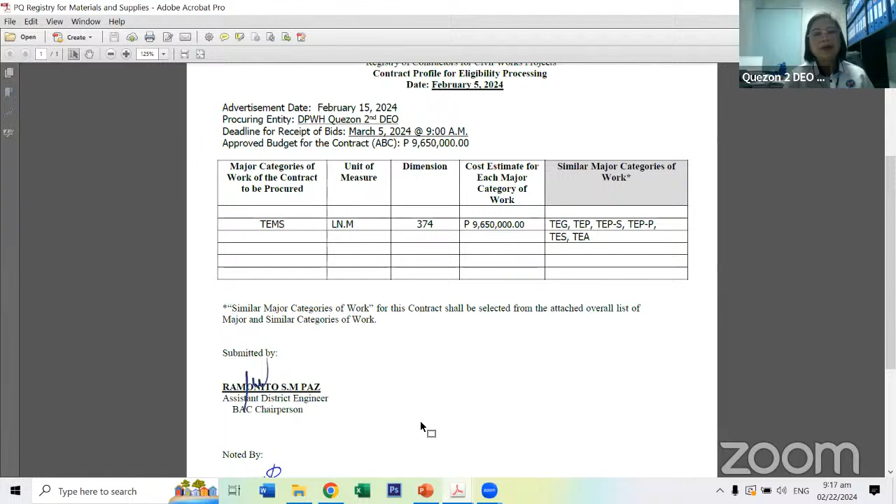Contract profile is TEMS 374 linear meter. May similar category support na TEG, TEP, TEP-S or 5 or S, TEP-S and TEP-P, TES and TEA. So makikita ito po yung mga categories, similar categories.

Approved budget for the contract, 7,425,000 pesos. Source of fund, GAA 2024. Contractor size range, small B with license category C and D. Cost of bidding documents is 10,000 pesos.

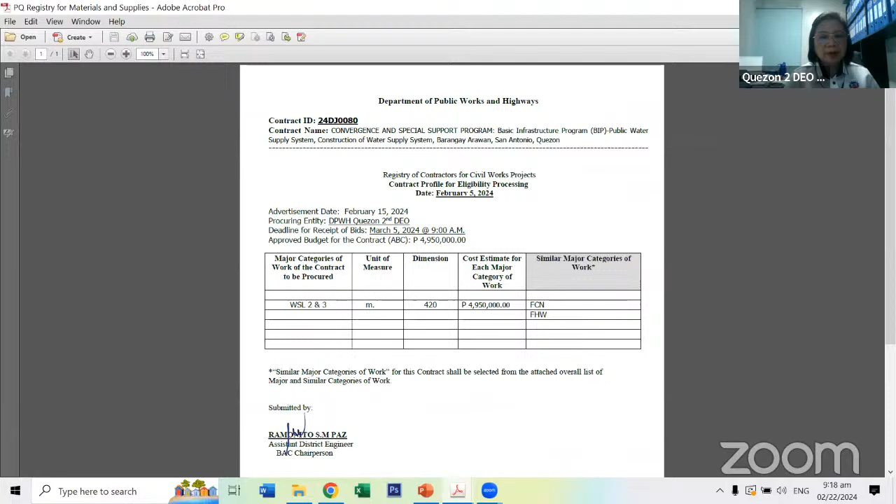Contract profile. Ang major category support po is BICWOPLS for one-story building. Next po.

Number 4. 24DJ0080, Convergence Special Support Program, Basic Infrastructure Program or BIP, Public Water Supply System, Construction of Water Supply System, Barangay Arawan, San Antonio, Quezon. Scope of work is construction of 420 linear meter water supply system.

Approved budget for the contract, 4,950,000 pesos. Source of fund, GAA 2024. Contract duration is 120 calendar days. Contractor size range, small B with license category C and D. Cost of bidding documents is 5,000 pesos. Ito po yung contract profile, eligibility profile, WSL 2 and 3, ang major categories of work.

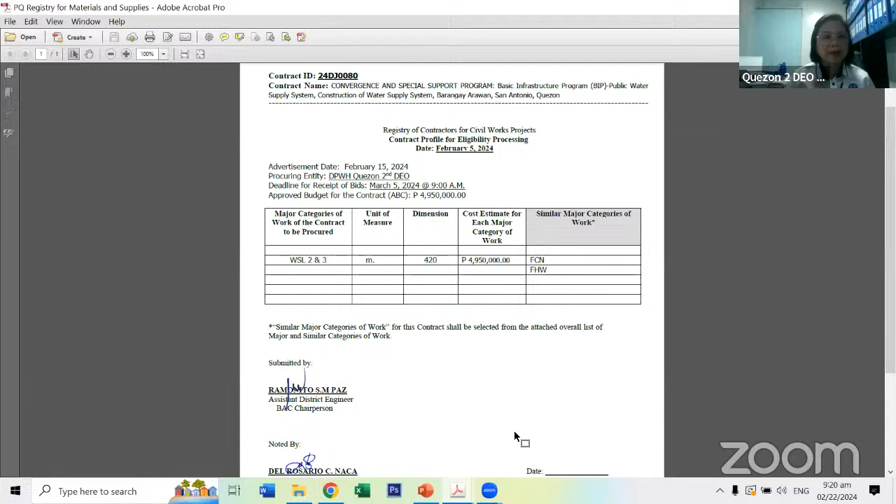Okay, next is number 5, 24DJ0081, Convergence Special Support Program, Basic Infrastructure Program or BIP, Public Water Supply System, Construction of Water Supply System, Barangay Bignay 1, Sariaya, Quezon.

Scope of work, construction of 540 linear meter water supply system. Approved budget for the contract is 4,950,000. Source fund, GAA 2024. Contract duration is 120 calendar days. Contractor size range, small B with license category C and D. Cost of bidding documents is 5,000 pesos.

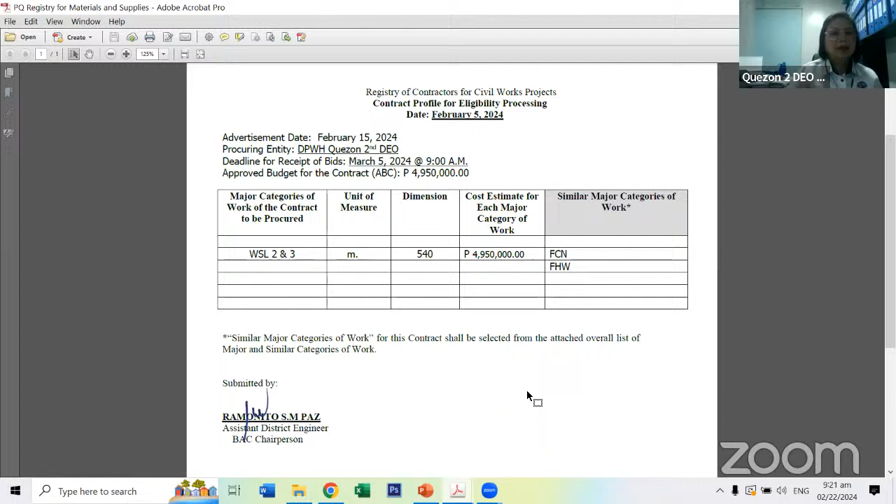Contract profile is major category support, WSL 2 and 3. Next po.

Approved budget for the contract, 2,475,000. Source of fund GAA 2024 and contract duration 105 calendar days. Contractor sizing small B with license category C and D. Cost of bidding documents 5,000 pesos.

Contract profile eligibility, BICWOPS for one-story building. So next po is yung presentation ng program, scope of work, and plans. Thank you.

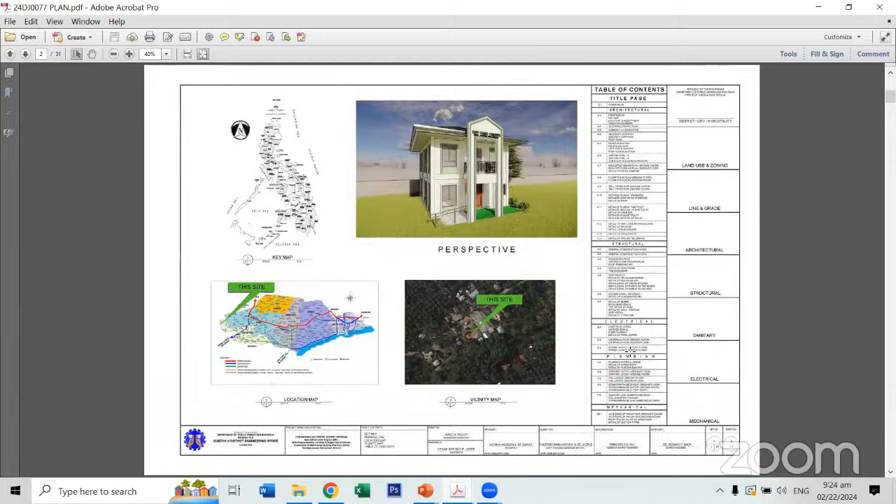Plans of the proposed project. This is the title page. This page shows the perspective, the location map, the vicinity map, and also the table of contents.

This shows the site development plan, the project. This shows the summary of quantities. This page shows the ground floor plan, the second floor plan, and the roof plan of the project.

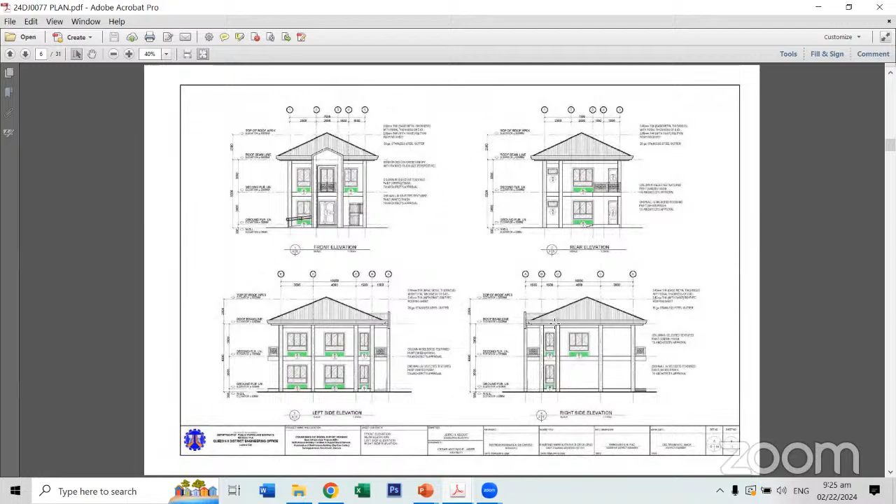This page shows the front, rear, left side, and right side elevation. This plan shows the schedule of doors and windows.

This page shows the reflected ceiling plan and the detail of metal furring. This page shows the floor finish plan. This page shows the wall finish plan for ground floor and second floor.

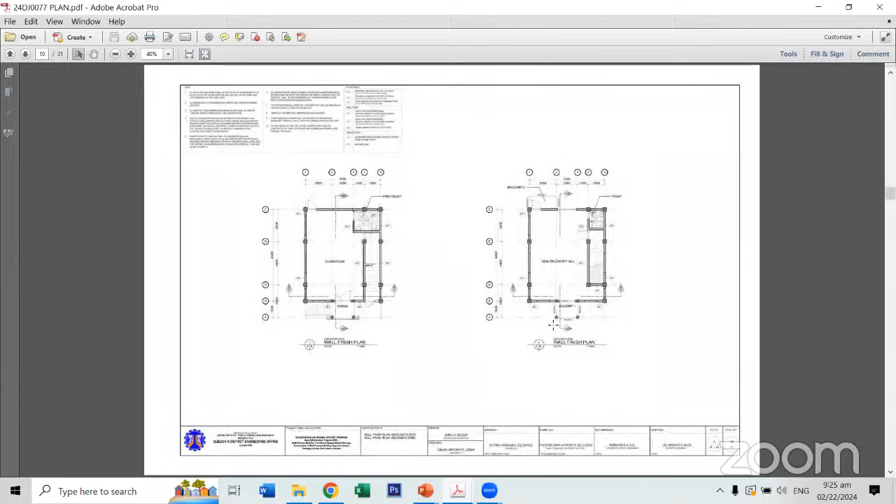This page shows the details of section of staircase, the details of ramps, details of plan of staircase. This shows the detailed plan of the toilet, detailed section of the PWD toilet, details of grab bar, and detailed section of toilet.

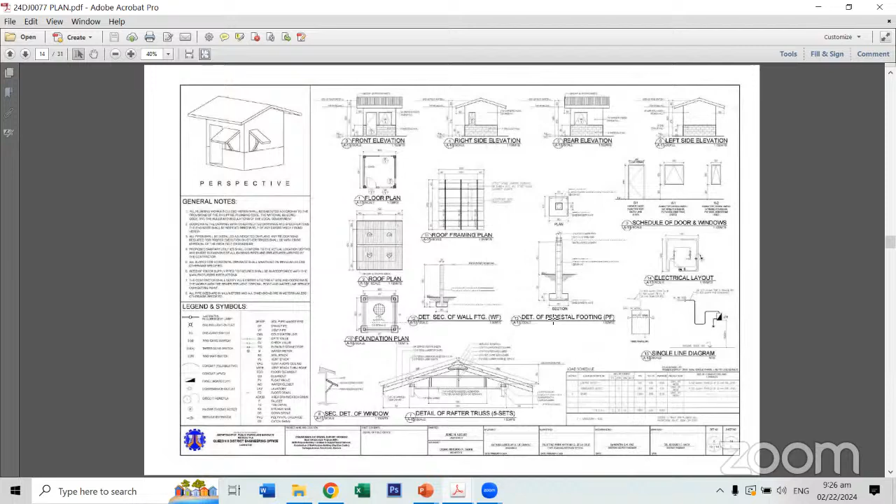This shows the DPWH standard field office. This shows the DPWH standard project billboard. These are the general construction notes.

This page shows the foundation plan, the second floor framing plan, and the roof framing plan. This shows the truss diagram and the details of main trusses.

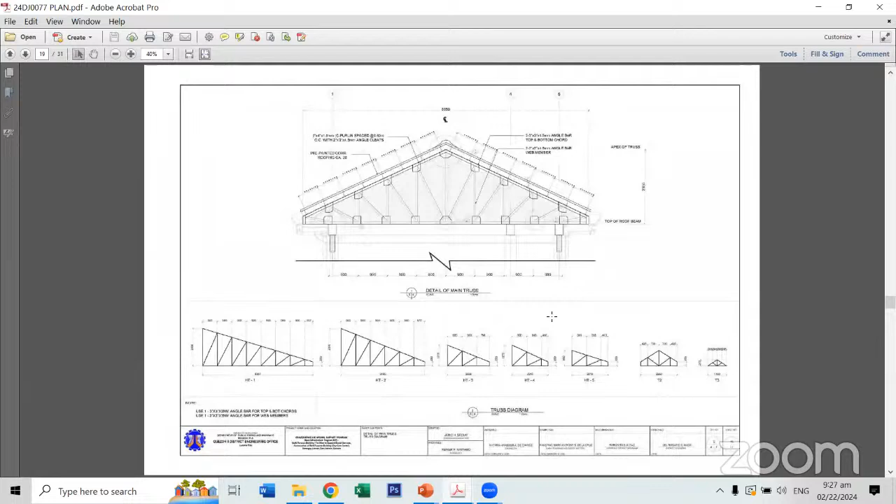This shows the details of purlin splice, the details of truss anchorage, details of connection of purlin to top chord, details of connection of purlin to sag rod, details of connection of cross bracing, and other details.

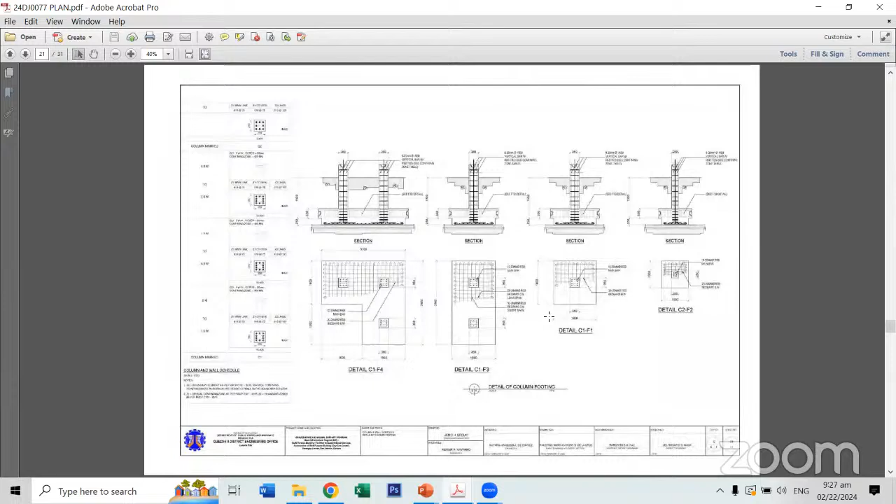This shows the details of the column footing. This shows the details of the staircase and the spot details, also the detail of wall footing, and the details of beams.

This shows the details of the panel board, the riser diagram, and the electrical notes. Also the load schedule of the electric. This shows the lighting layout for the first and second floor.

This shows the power layout for the ground floor and the second floor.

This page shows the detail of floor clean out and the detail of catch basin. Also the plumbing notes.

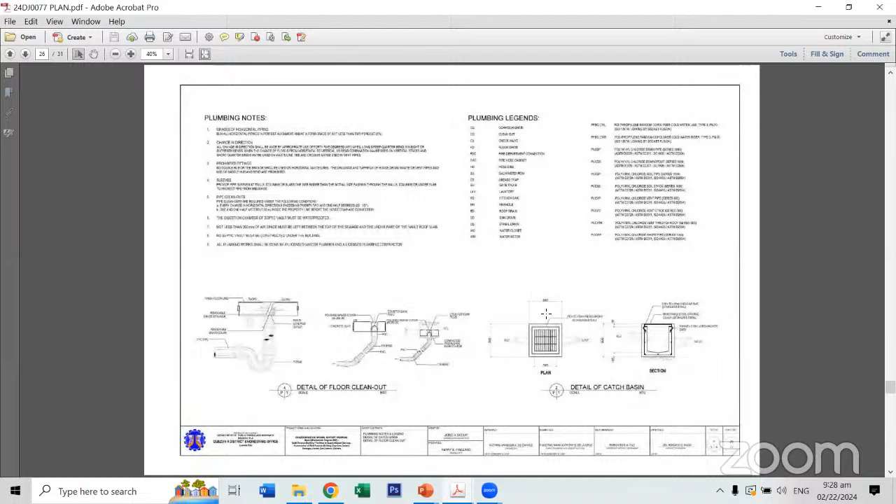This shows the sanitary layout for the ground floor and the second floor.

This shows the cold water line layout for the first and second floor.

The storm drainage layout for the first floor, second floor, and the roof. Next page, please.

This shows the sanitary line isometric diagram and for the storm drainage, and the isometric diagram for the sanitary line and the CWL.

This shows the AC and exhaust fan layout for the first and second floor. Also the mounting detail for the air conditioning condenser and the detail of suction piping.

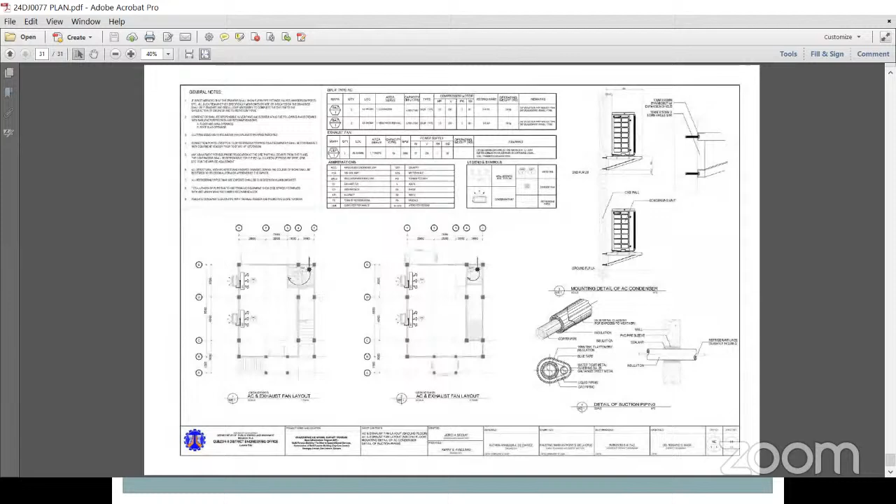Plans of the scopes of works. For the scopes of works, Part A, facilities for the engineer: construction of field office for the engineer, provision of furnitures, fixtures, equipment, and appliances for the field office for the engineer, and provision of progress photographs.

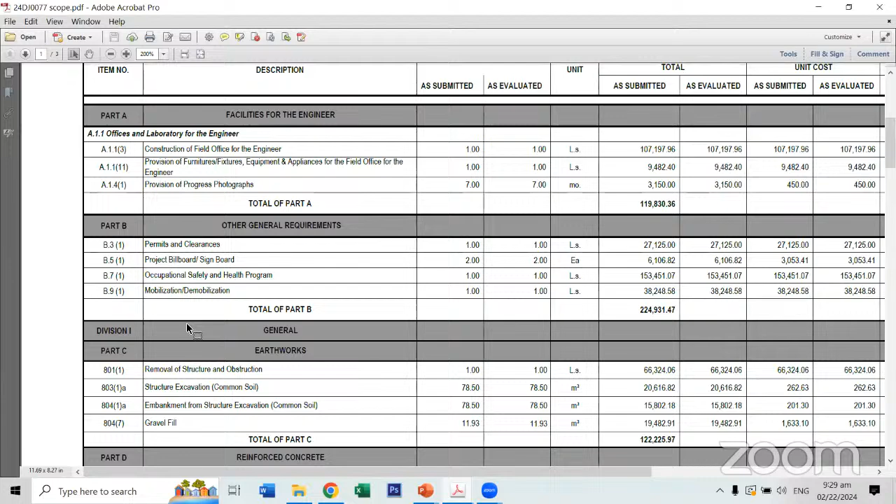For Part B, other general requirements: permits and clearances, project billboard, signboard, occupational safety and health program, and mobilization, demobilization. Under Division 1, General, Part C, Earthworks: removal of structure and obstruction, structure excavation for common soil, embankment from structure excavation, common soil, and gravel fill.

Under Part D, reinforced concrete: structural concrete 4,000 PSI Class A at 28 days, structural concrete 3,000 PSI Class A at 28 days, reinforcing steel grade 40 deformed and reinforcing steel grade 60 deformed, and also formworks and false works.

Under Division 2, Buildings, Part E, Finishing and Other Civil Works: soil poisoning, CHB non-load bearing including reinforcing steel 100 millimeter, CHB non-load bearing including reinforcing steel 150 millimeter, carpentry and joinery works, doors for wood panel.

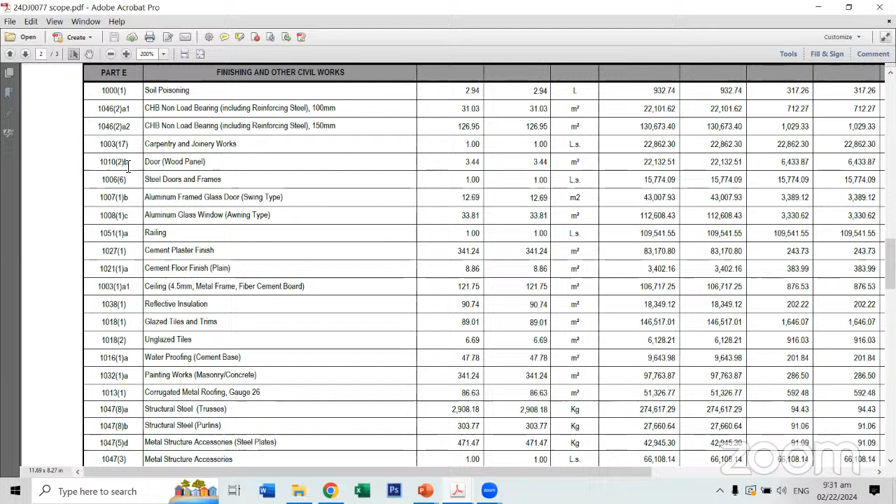Steel doors and frames, aluminum framed glass doors swing type, aluminum glass window awning type, railing, cement plaster finish, cement floor finish plain, ceilings 4.5 millimeter metal frame, fiber cement board, reflective insulation, glazed tiles and trims, unglazed tiles, waterproofing for cement base.

Painting works for masonry and concrete, corrugated metal roofing gauge 26, structural steel trusses, structural steel purlins, metal structure accessories, steel plates, metal structure accessories, bolts and rods, fabricated metal roofing accessory, flashing gauge 26.

We also have fabricated metal roofing accessory gauge 24 for gutters, sewer line works, cold water line works, storm drainage and downspout, plumbing fixtures, and catch basin.

For Part F electrical: conduit boxes and fittings, conduit works and conduit roughing-ins, wires and wiring devices, panel board with main and branch breaker, lighting fixtures and lamps. For Part G mechanical: air conditioning package split type.

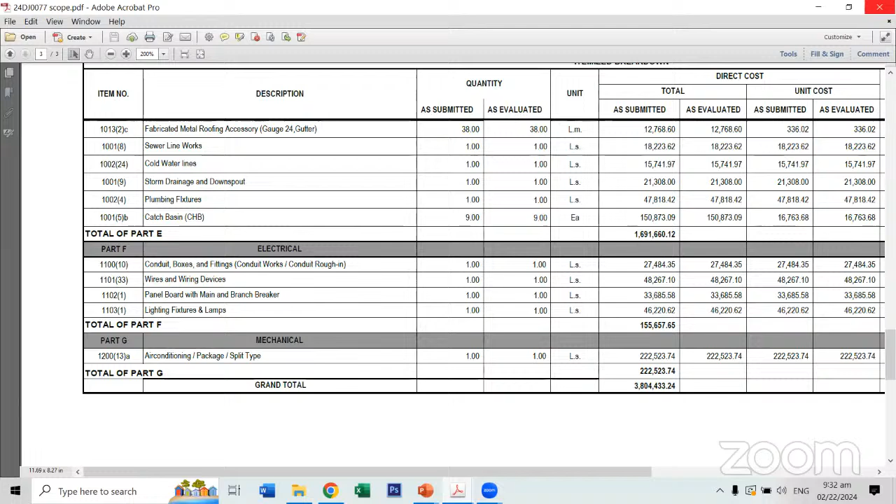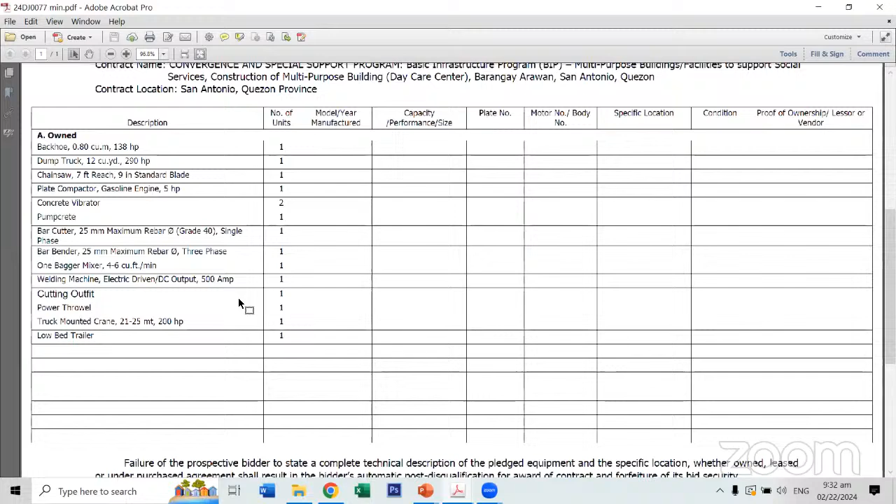Minimum equipment requirements: one backhoe 0.80 cubic meter 138 horsepower, one dump truck 12 cubic yards 290 horsepower, one chainsaw 7 feet reach 9 inches standard blade, one plate compactor gasoline engine 5 horsepower, two concrete vibrator, one pumpcrete, one bar cutter 25 millimeter maximum rebar.

Single phase, one bar bender 25 millimeter maximum rebar three phase, one bagger mixer 4 to 6 cubic feet, one welding machine electrical driven DC output 500 amperes, one cutting outfit, one power trowel, one truck mounted crane 21 to 25 metric tons 200 horsepower, and one low bed trailer.

For manpower requirements, we need one project manager, one project engineer, one accredited materials engineer, one construction foreman, one first aider, and one safety officer.

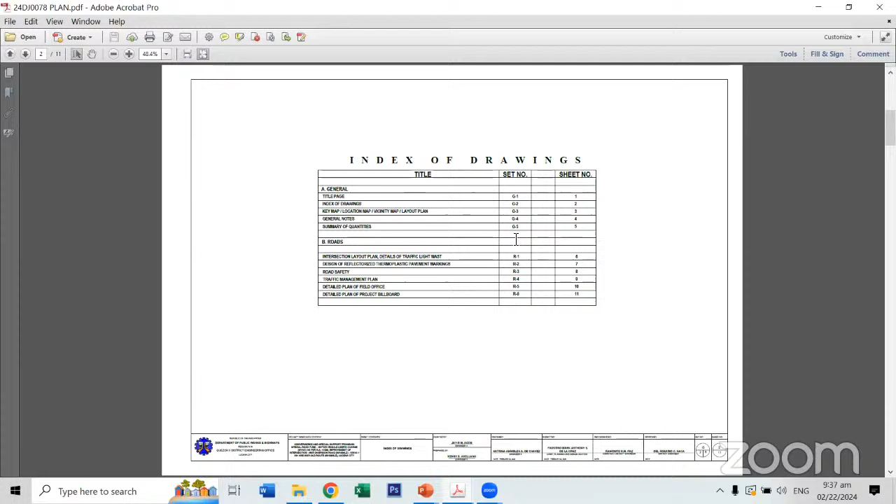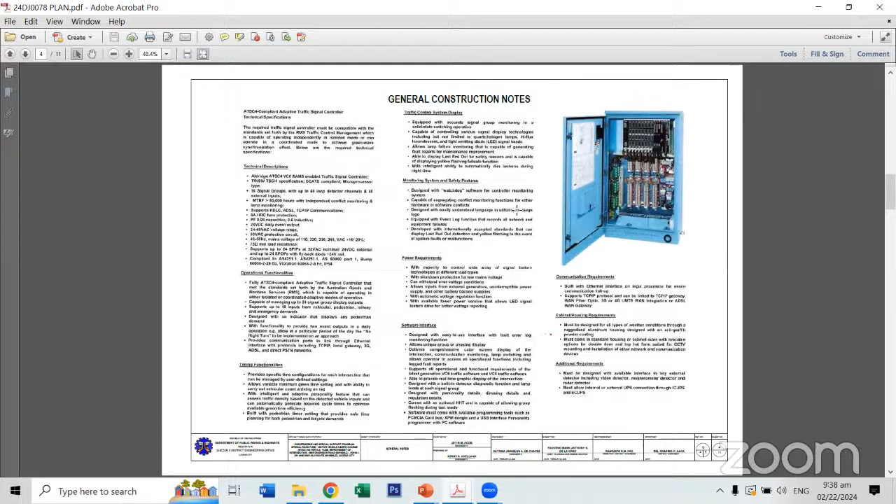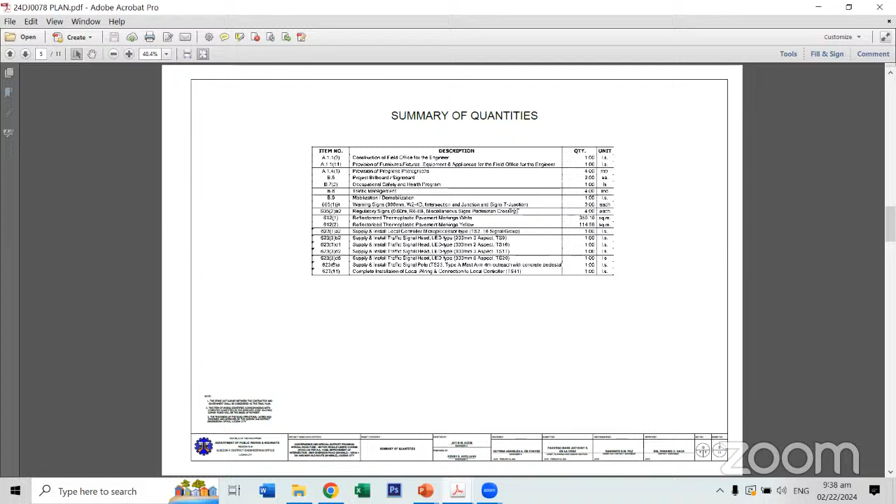Plans of the proposed project. Title page po natin. Index of drawings. Layout plan, location map, key map, vicinity map. General construction notes. Summary of quantities.

Intersection layout plan. Details of traffic light mast. Details of reflectorized thermoplastic pavement markings. Road safety details.

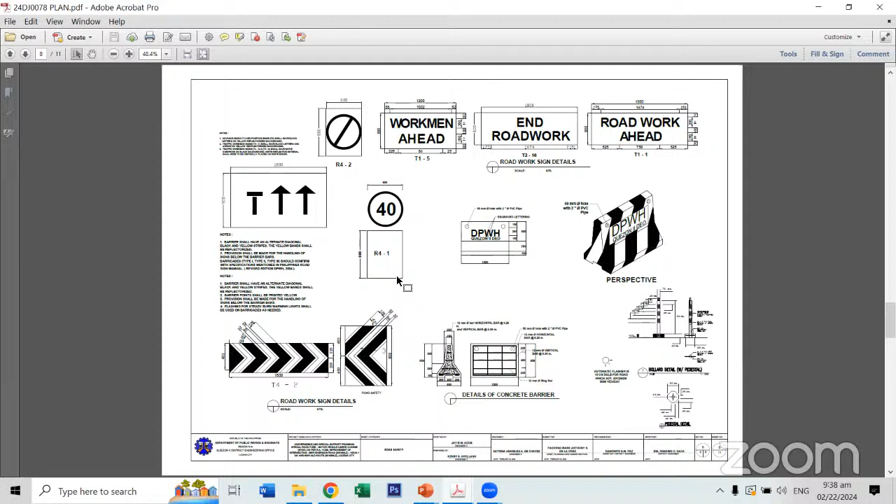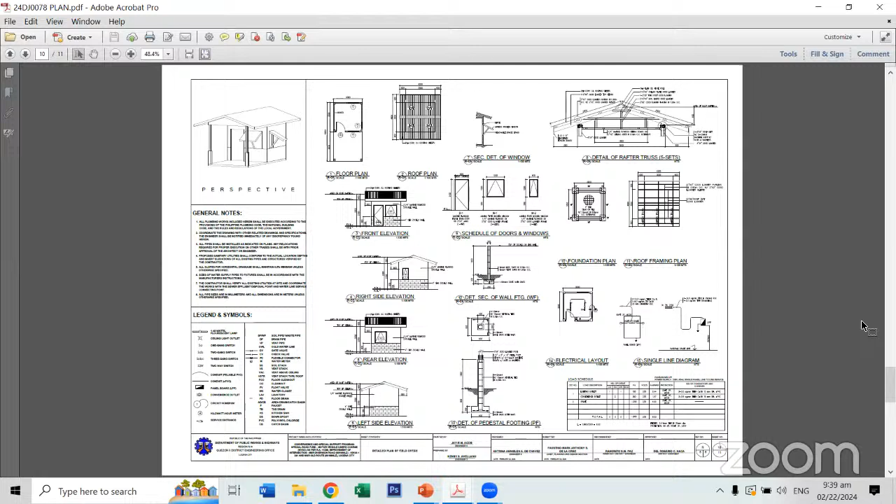Traffic management plan. Details of field office. Kenny, excuse, pasabi doon sa inyong mga kalapit, pag masyado mong maingay, hindi magkaintindihan. Okay po ma'am. Thank you. Okay na po ma'am.

DPWH Standard Project Billboard. Project scope of works.

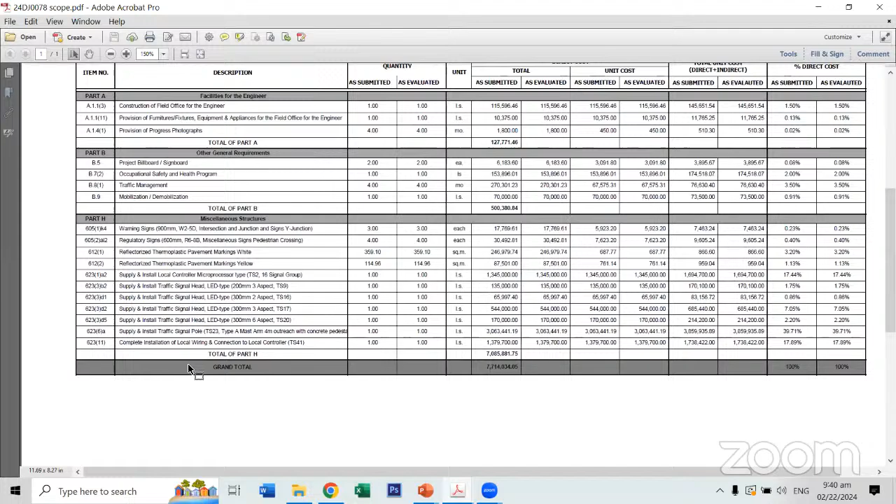Iba na ba din yung existing na parang hindi, wala na tayong asking sa.

For Part A, facilities for the engineer. Item A.1.13, construction of field office for the engineer. A.1.11, provision of furnitures, fixtures, equipment, and appliances for the field office for the engineer. A.1.41, provision of progress photographs.

B.5, project billboard signboard. B.72, occupational safety and health program. B.81, traffic management. B.9, mobilization, demobilization.

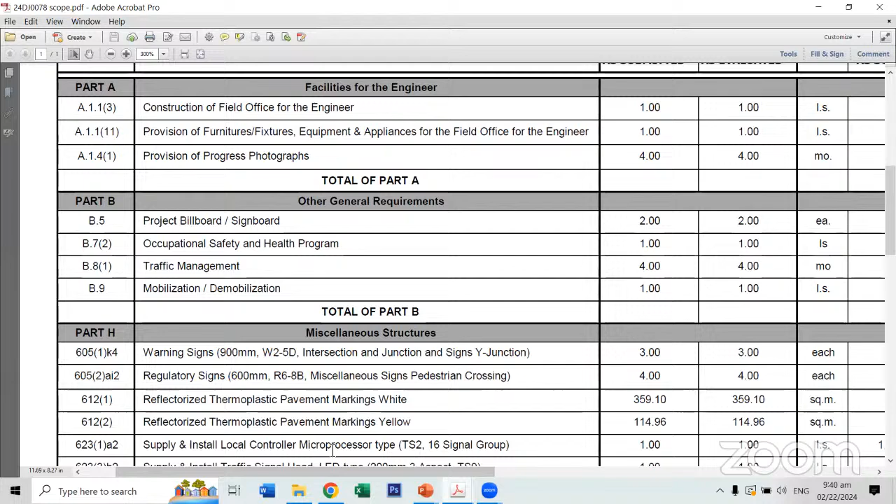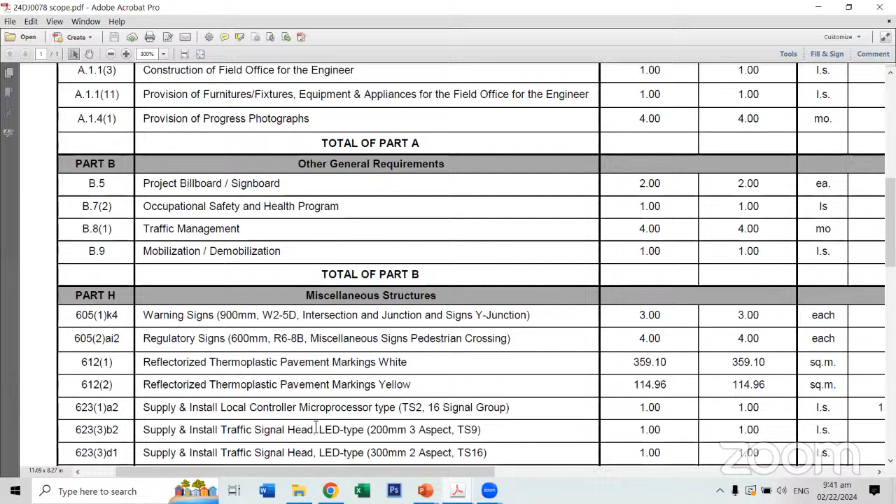For Part H, miscellaneous structures. Item 6051K4, warning signs, 900mm W2-5D, intersection and junction and signs Y junction. Item 6052A I2, regulatory signs, 600mm R6-8B, miscellaneous signs, pedestrian crossing.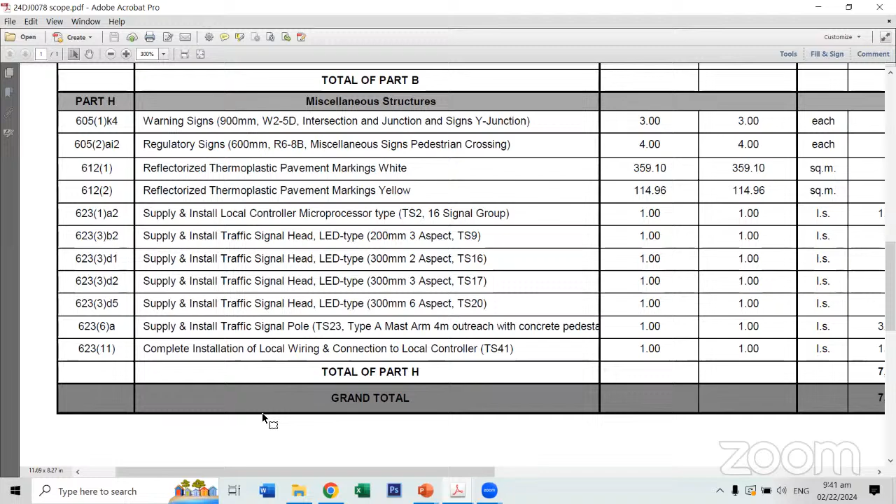Item 612.1, reflectorized thermoplastic pavement markings, white. Item 612.2, reflectorized thermoplastic pavement markings, yellow. Item 623.1A2, supply and install local controller microprocessor type TS2, 16 signal group.

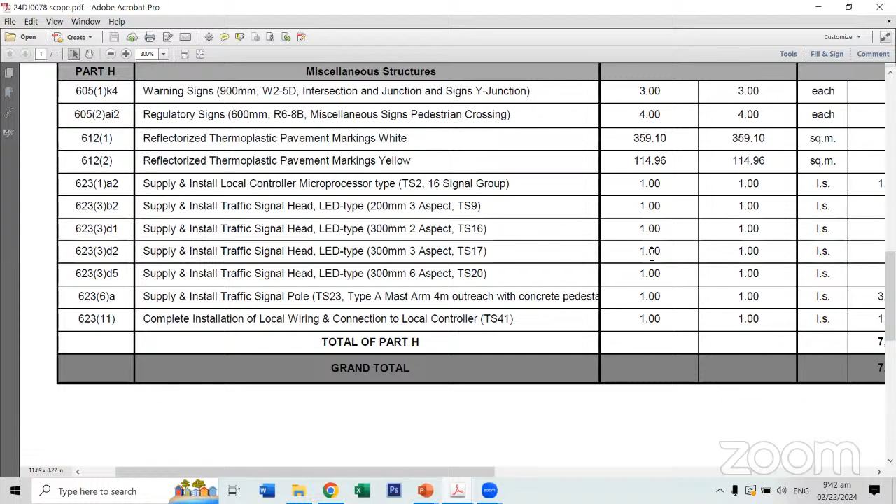Item 623.3B2, supply and install traffic signal head LED type 200mm 3 aspect. 623.3D1, supply and install traffic signal head LED type 300mm 2 aspect. 623.3D2, supply and install traffic signal head LED type 300mm 3 aspect. 623.3D5, supply and install traffic signal head LED type 300mm. 6236A, supply and install traffic signal pole, type A mast arm, 4-meter outreach with concrete pedestal. Item 62311, complete installation of local wiring and connection to local controller TS41.

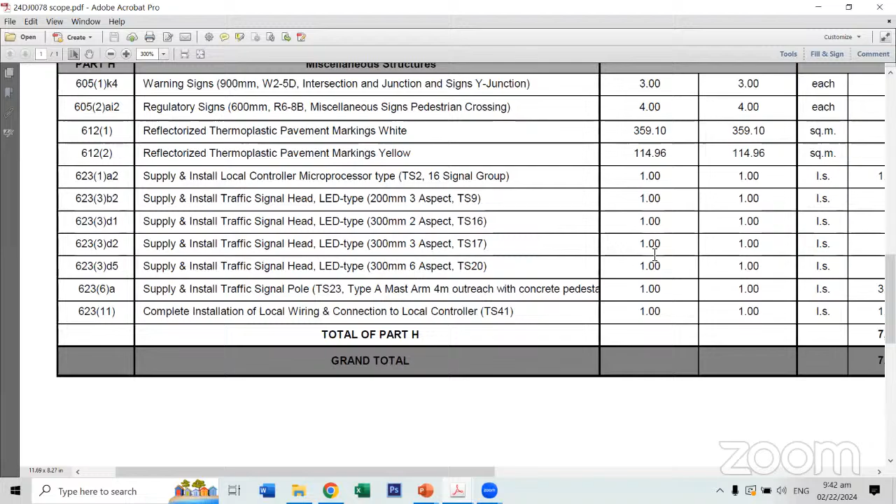For our minimum equipment requirements: cargo service truck 1, applicator machine 1, kneading machine 1.

For our manpower requirements: 1 project manager with 5 years of experience, 1 project engineer with 5 years of experience, accredited materials engineer 1, construction foreman, first aider, and safety officer.

Approved budget for the contract is 9,650,000 pesos. Contract duration is 120 calendar days. Thank you po. Thank you, Engineer Kenny.

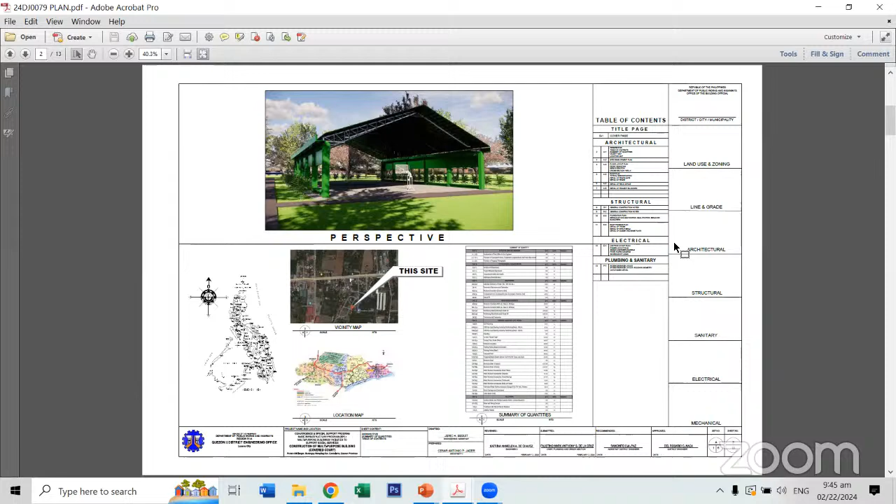Plans of the proposed project. This is the title page. Perspective, summary of quantities, table of contents. Site development plan. Floor layout plan. Front elevation, rear elevation.

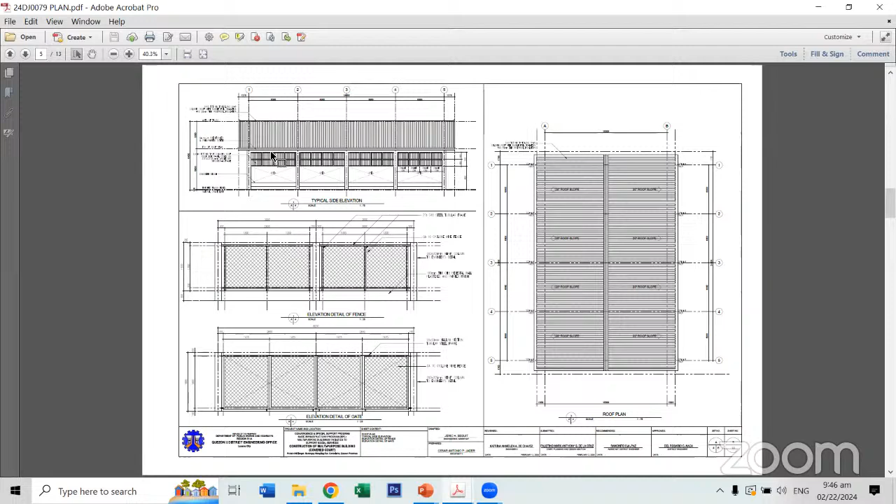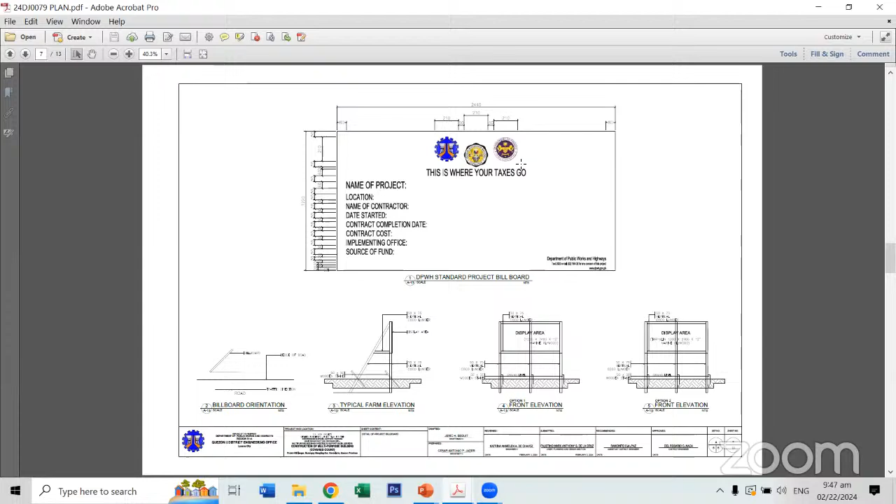Next po is typical side elevation, elevation detail of fence, elevation detail of gate, front roof plan. Detail of field office. Detail of project billboard. General construction notes.

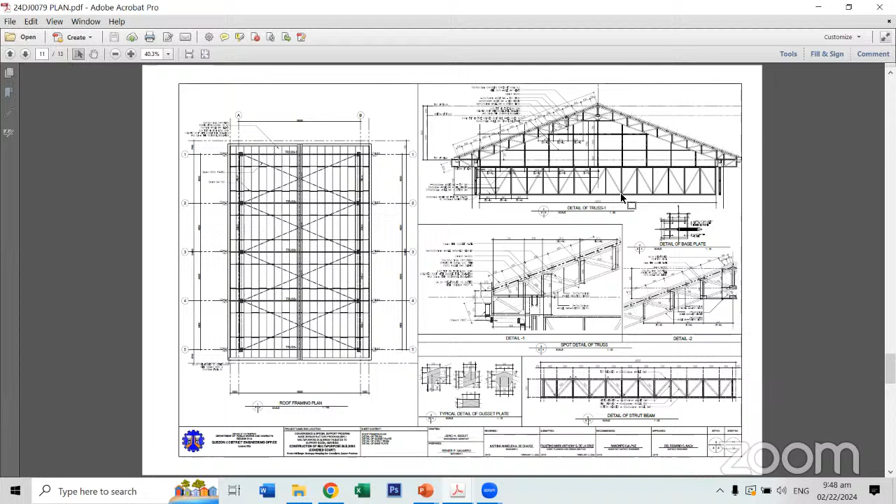Detail of column footings, detail of wall footings, schedule of beam, typical detail of beam, detail of concrete bench. Roof framing plan, detail of truss, detail of gusset plate, detail of strut beam, detail of base plate. Lighting layout plan, power layout plan, single line, riser diagram, detail of panel board, schedule of loads. Roughing in sanitary and storm drain layout plan, detail of catch basin.

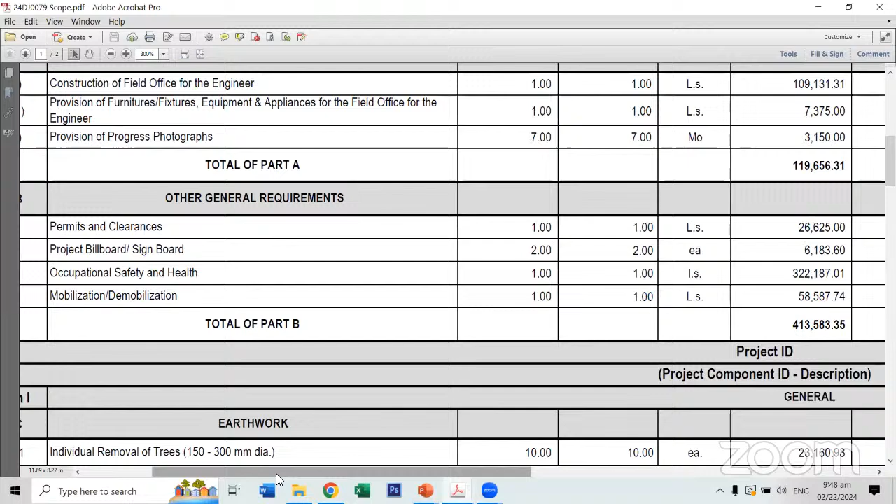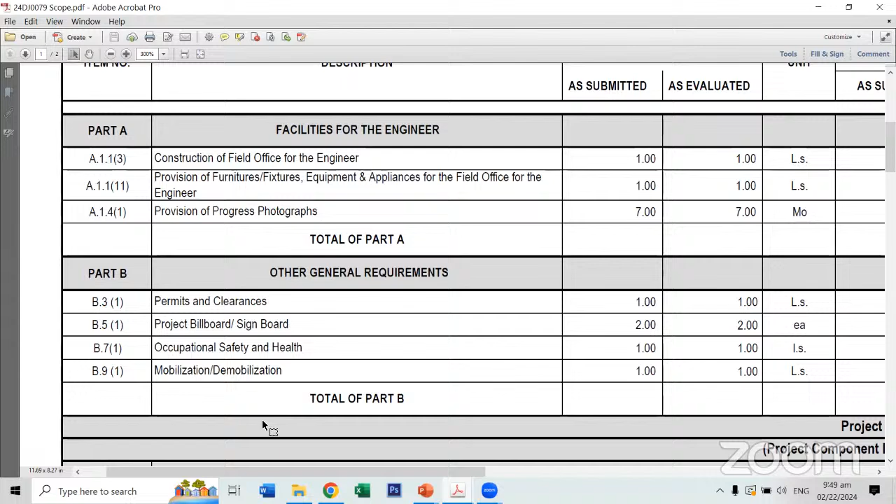Scope of works. For Part A, facilities for the engineer, A.1.13, construction of field office for the engineer, A.1.11, provision of furniture, fixtures, equipment, and appliances for the field office for the engineer. A.1.41, provision of progress photographs. Part B, other general requirements, B.31, permits and clearances, B.51, project billboard signboard, B.71, occupational safety and health, B.91, mobilization demobilization. For Division 1, Part C, earthwork.

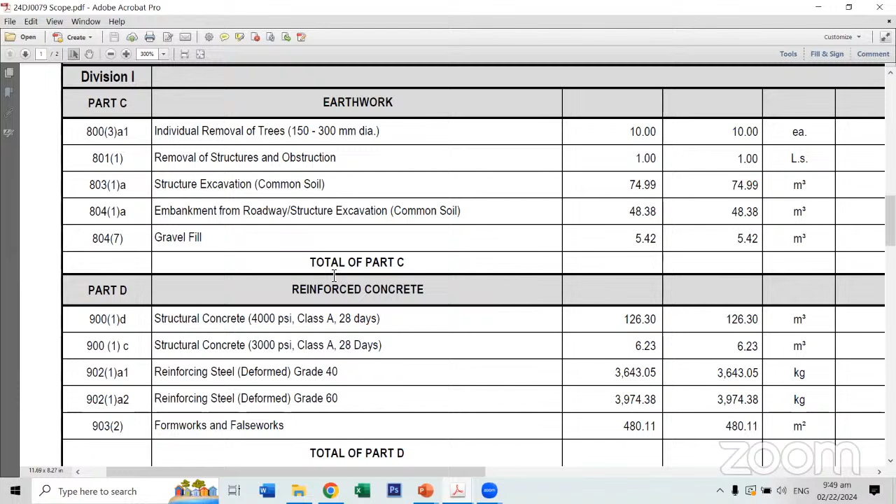800.3A1, individual removal of trees, 801.1, removal of structure and obstruction, 803.1A, structure excavation, common soil. 804.1A, embankment from roadway, structure excavation, common soil. 804.7, gravel fill. For Part D, reinforced concrete, 900.1D, structural concrete, 4000 PSI, Class A, 28 days, 900.1C, structural concrete.

3000 PSI, Class A, 28 days. 902.1A1, reinforcing steel, deformed grade 40. 902.1A2, reinforcing steel, deformed grade 60, 903.2, formworks and false works.

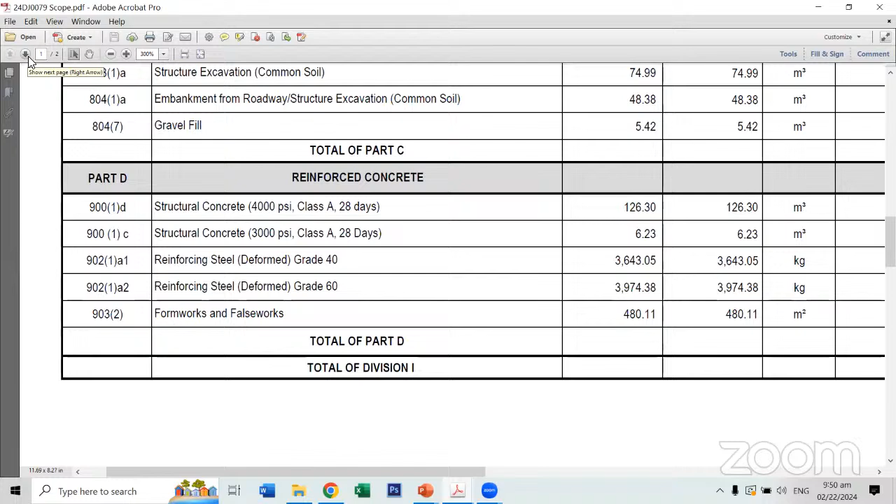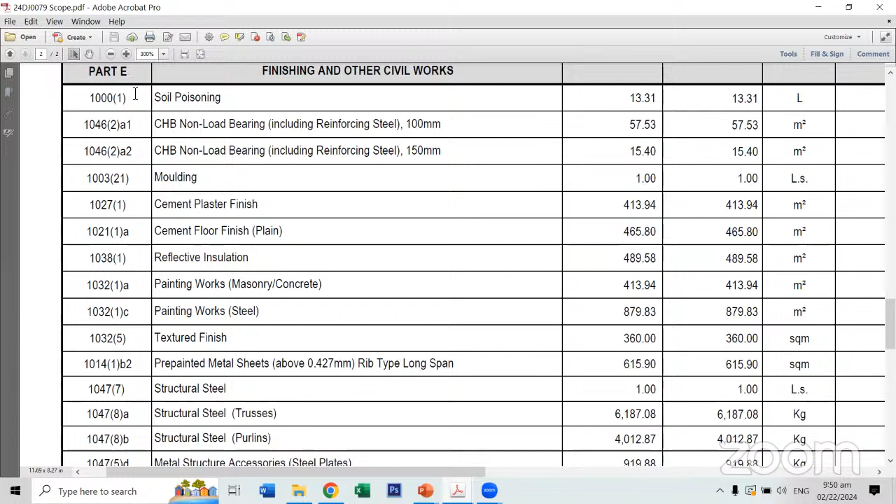Division 2, Part E, finishing and other civil works, 1000.1, soil poisoning. 1046.2A1, CHB, non-load bearing, including reinforcing steel, 100 millimeter. 1046.2A2, CHB, non-load bearing, including reinforcing steel, 150 millimeter. 1003.21, molding, 1027, cement plaster finish, 1021.1A, cement floor finish plain, 1038, reflective insulation, 1032.1A, painting works, masonry concrete.

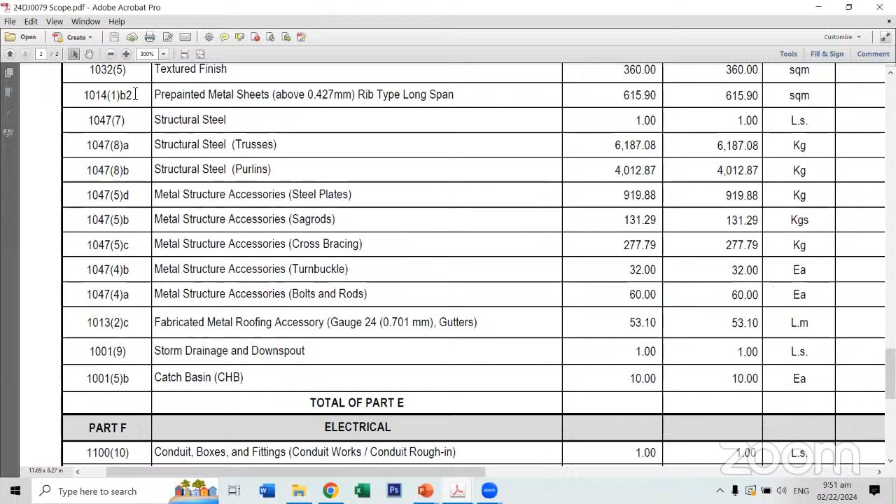1032.1C, painting work steel, 1032.5, texture finish, 1014.1B2, prepainted metal sheet, rib type long span, 1047.7, structural steel, 1047.8A, structural steel trusses, 1047.8B, structural steel purlins, 1047.5D, metal structure accessories steel plates, 1047.5B, metal structure accessories sagrods, 1047.5C, metal structure accessories cross bracing, 1047.4B, metal structure accessories turnbuckle.

1047.4A, metal structure accessories bolts and rods, 1013.2C, fabricated metal roofing accessories gutter, 1001.9, storm drainage and downspout, 1001.5B, catch basin CHB for Part F, electrical. 1100.10, conduits boxes and fittings, 1101.33, wires and wiring devices, 1102.1, panel board with main and branch breaker, 1103.1, lighting fixtures.

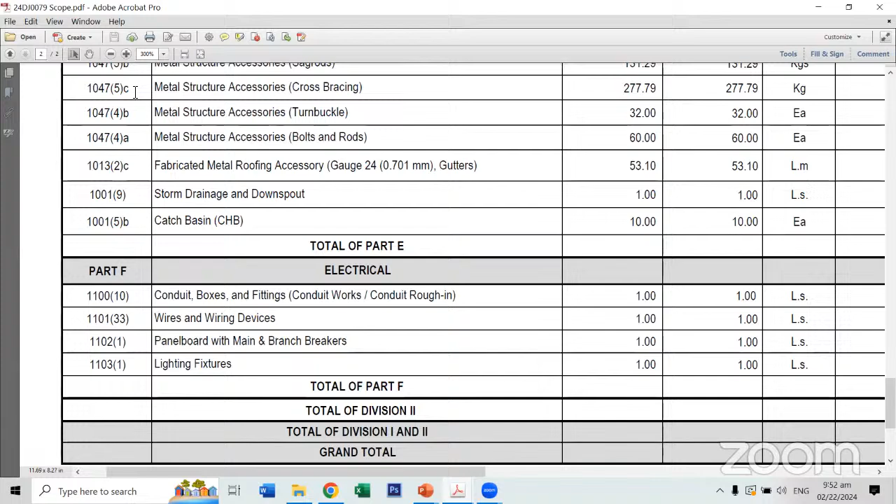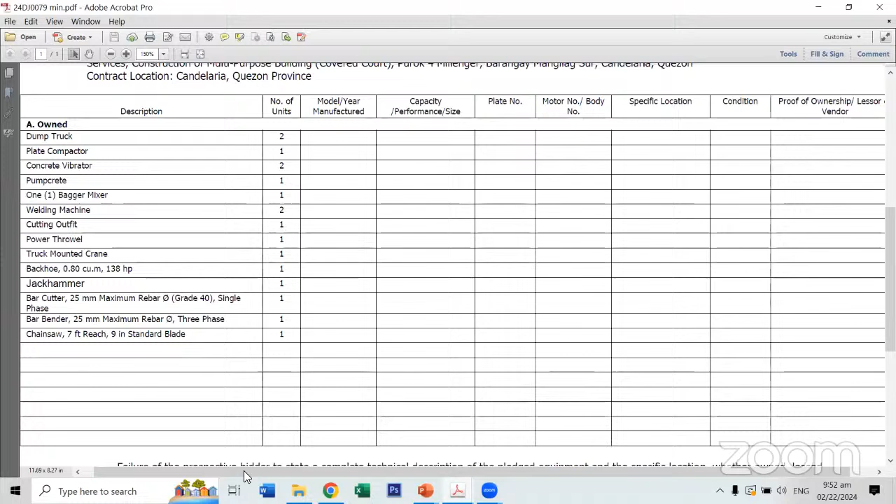Minimum equipment requirements: two dump trucks, one plate compactor, two concrete vibrators, one bagger mixer, two welding machines, one cutting outfit, one power trowel, one truck-mounted crane, one backhoe (0.80 cubic meter, 138 horsepower), one jackhammer, one bar cutter, one bar bender, one chainsaw.

For manpower requirements: one project manager with 5 years of experience, one project engineer with 5 years of experience, one accredited materials engineer, one construction foreman with 5 years of experience, one first aider, and one safety officer.

The approved budget for the contract is 7,425,000 pesos and the contract duration is 210 calendar days.

May question po kaya? Thank you, Engineer Justin. So if there's no question, thank you po, ma'am. Next project po tayo.

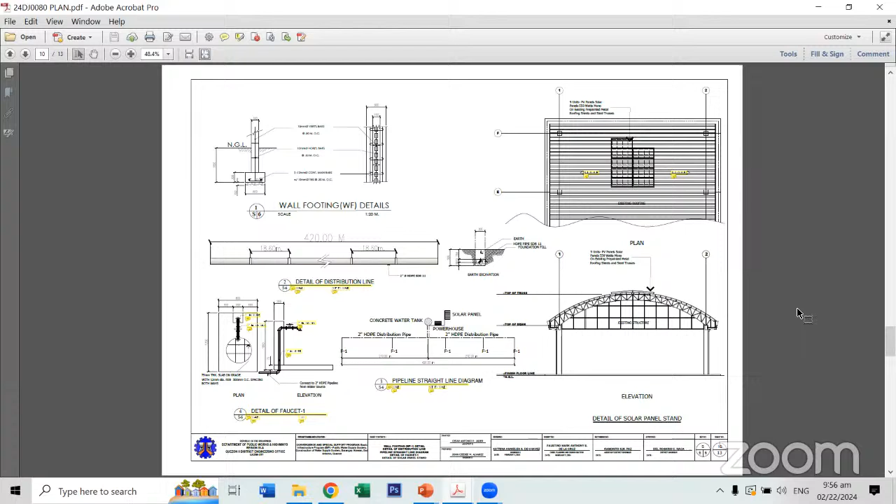This page shows the floor plan, the roof framing plan, front elevation, right side elevation of the detailed powerhouse, and the details of doors. This page shows the details of solar panel stand, the pipeline straight line diagram, detail of faucet, and the wall footing details, and the distribution line. This page shows the schedule of load and the riser single line diagram and the details of panel board.

This is the details of DPWH field office, details of the DPWH standard project billboard. That's it for the scope of works.

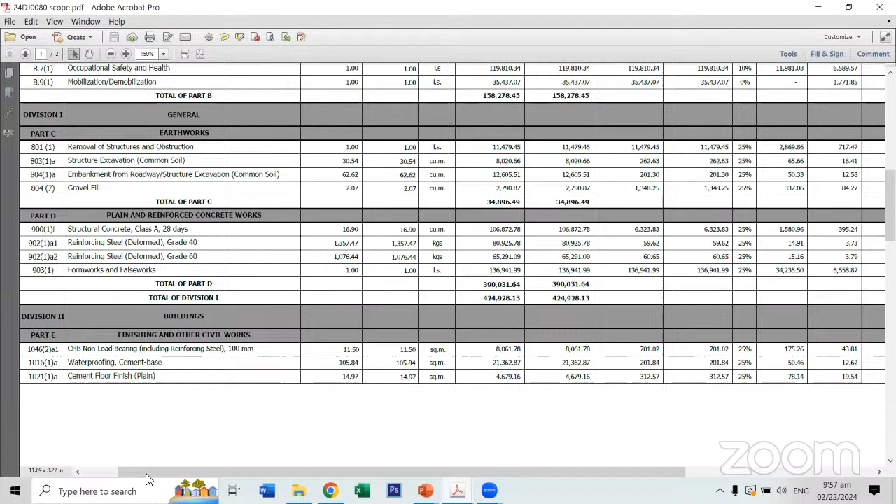For the scope of works, we have Part A, facilities for the engineer: construction of field office for the engineer, provision of progress photographs. Under Part B, other general requirements, we have project billboard, signboard, occupational safety and health, mobilization and demobilization.

Under Division 1 General, Part C, earthworks, we have removal of structures and obstruction, structure excavation for common soil, embankment from roadway, structure excavation for common soil, and gravel fill.

For Part D, plain and reinforced concrete works, we have structural concrete Class A (28 days), reinforcing steel deformed grade 40, reinforcing steel deformed grade 60, and formworks and falseworks.

For Division 2 buildings, Part E, finishing and other civil works, we have CHB non-load bearing including the reinforcing steel at 100 millimeter. We also have waterproofing for cement base and cement floor finish plain.

We also have cement plaster finish. We have railings, painting works for masonry and concrete, painting works for steel, pre-painted metal sheets above 0.427 millimeter rib type long span, and also pipe and fittings 50 millimeter diameter, high density polyethylene.

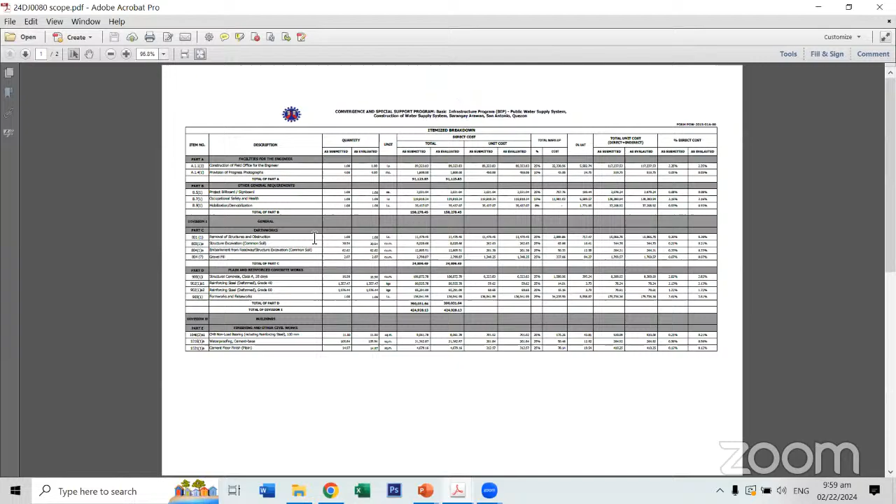For the minimum equipment requirements, we have one service vehicle, one water truck, one concrete vibrator, one bagger mixer, one bar cutter, one bar bender, one welding machine, one cutting outfit, one drilling machine, one backhoe, and one dump truck.

For manpower requirements, we have one project manager, one project engineer, one accredited materials engineer, one construction foreman, one first aider, and one safety officer. The approved budget for the contract is 4,950,000 pesos, and the contract duration is 120 calendar days.

Thank you. Thank you, Engineer Dante. May question po kaya?

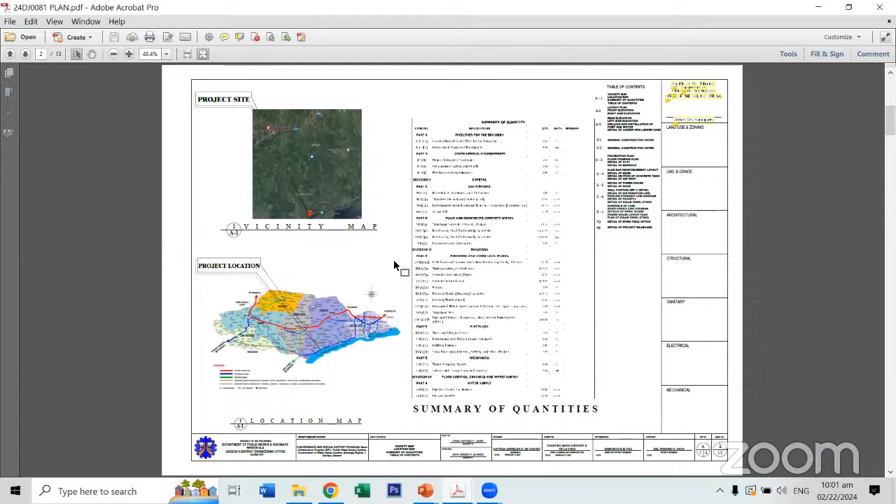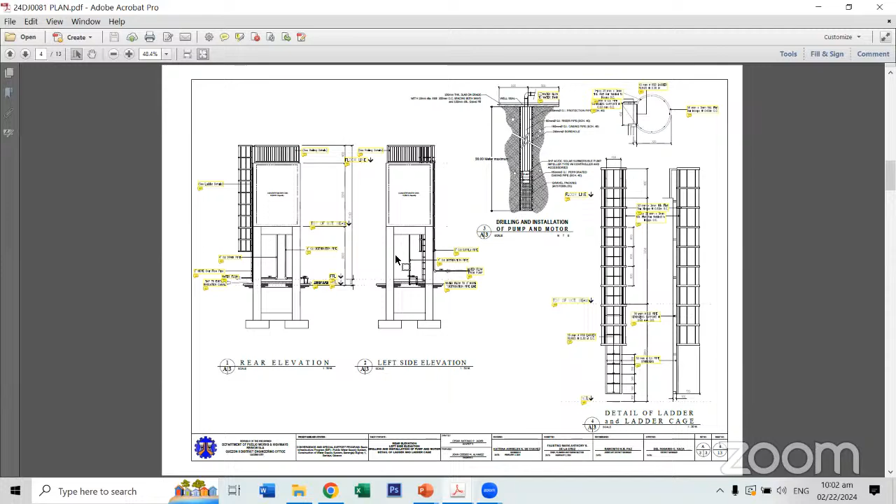Plans of the proposed project. Here we have the title page. We have the location map, vicinity map, and the summary of quantities. This page shows the front and right side elevation and also the layout plan of the water supply system. Here we have the rear and left side elevation, also the drilling and installation of pump and motor, also the details of ladder and ladder cage.

Here we have the general construction notes, page 1. Also the general construction notes, page 2. Here we have the detail of column 1, footing 1, the foundation plan, the floor framing plan, and the detail of manhole.

This shows the detail of section for concrete tank, the details of beam, and the details of air vents, and slab bar reinforcement layout. This page shows the floor plan, the roof framing plan, the details of the powerhouse, the rear side, left side, front and right side elevation, and the details of doors.

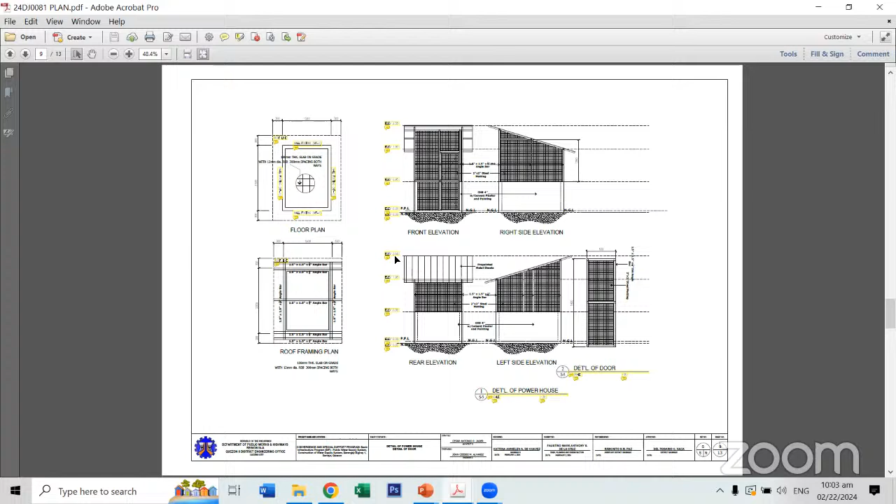This page shows the wall footing details, the details of faucet, pipeline straight line diagram, detail of distribution line, and the detail of solar panel stand. This page shows the schedule of load, the plan of solar panel stand, the details of panels board, and riser single line diagram. Also the powerhouse layout plan.

This is the DPWH field office details. This is the detailed plan for the DPWH standard project billboard.

Scope of works. For the scope of works, we have plan part A, facilities for the engineer, construction of field office for the engineer, and provision of progress photographs. For part B, other general requirements, we have project billboard and signboard, occupational safety and health, mobilization and demobilization.

For Division 1 General, Part C Earthworks, we have removal of structure and obstruction, structure excavation for common soil, embankment from roadway, structure excavation for common soil, and gravel fill. For Part D, plain and reinforced concrete, we have structural concrete Class A, 28 days, reinforcing steel, grade 40 deform, reinforcing steel, grade 60 deform, and formworks and false works.

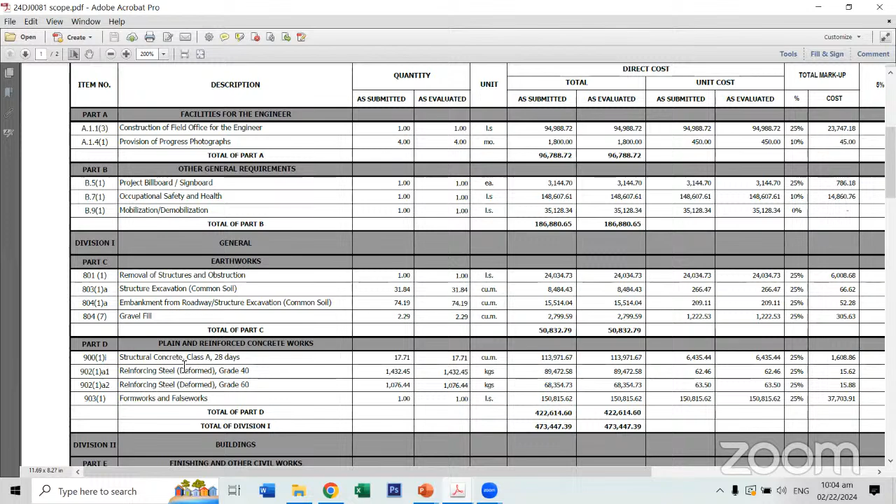Under Division 2 Buildings, Part E, Finishing and Other Civil Works, we have CHB, non-load bearing, including reinforcing steel at 100 millimeters, waterproofing cement base, and cement floor finish plain. We also have cement plaster finish, railing, painting works for masonry concrete, painting works for steel, pre-painted metal sheets above 0.427 millimeter rib type long span, structural steel, pipe and fittings 50 millimeter diameter high density polyethylene.

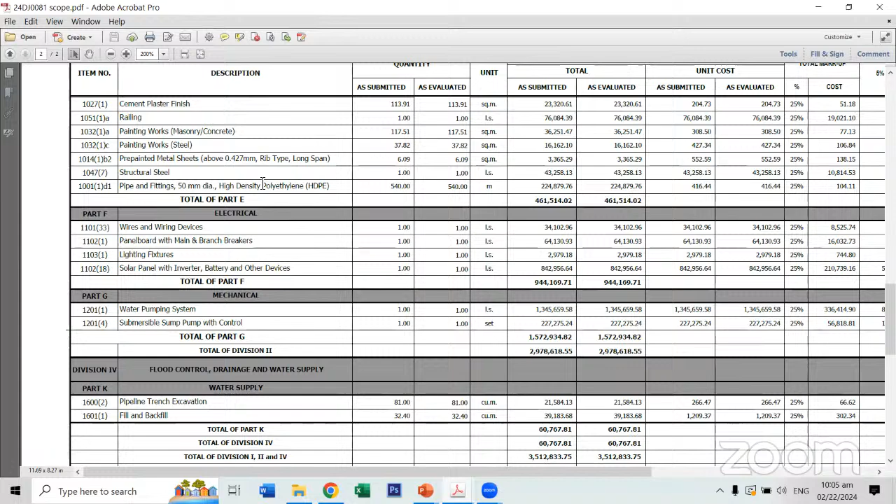Wires and wiring devices. We have panel board and main and branch breakers, lighting fixtures, solar panel with inverter, battery, and other devices. For part G, mechanical, we have water pumping system and submersible sump pump with control. Under Division 4, flood control, drainage, and water supply, Part K, water supply, we have pipeline, trench excavation, and fill and backfill.

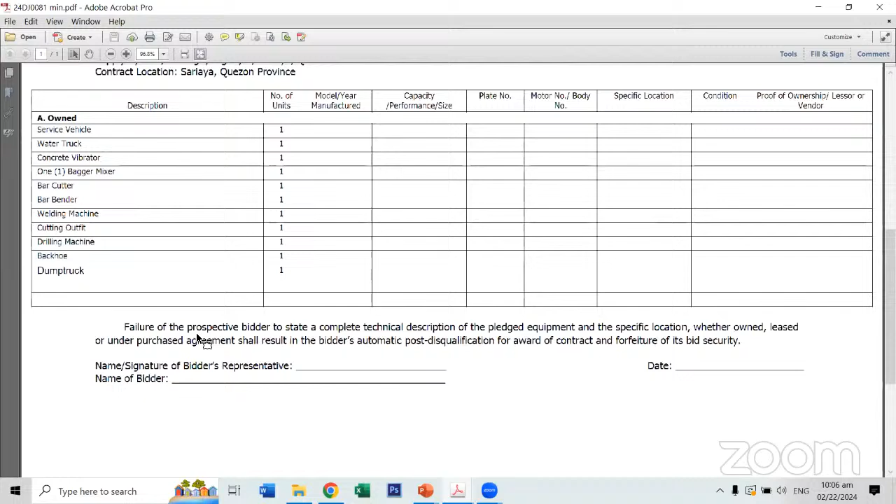The minimum equipment requirements. For the minimum equipment requirements, we need one service vehicle, one water truck, one concrete vibrator, one bagger mixer, one cut bar cutter, one bar bender, one welding machine, one cutting outfit, one drilling machine, one backhoe, and one dump truck.

For manpower requirements, we have one project manager, one project engineer, one accredited materials engineer, one construction foreman, one first aider, and one safety officer. The approved budget for the contract is 4,950,000 pesos, and the contract duration is 120 calendar days. Thank you.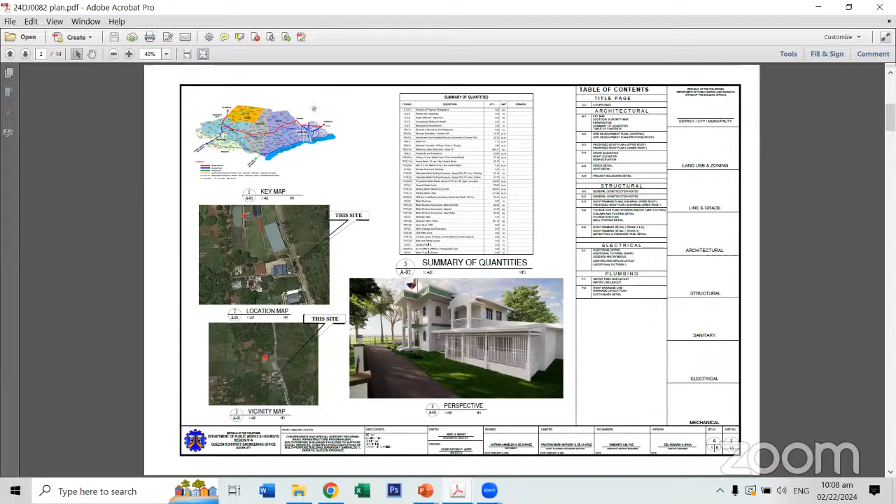Plans of the proposed project. This is the title page. This shows the perspective, the location map, and the vicinity map. Also the summary of quantities and the table of contents.

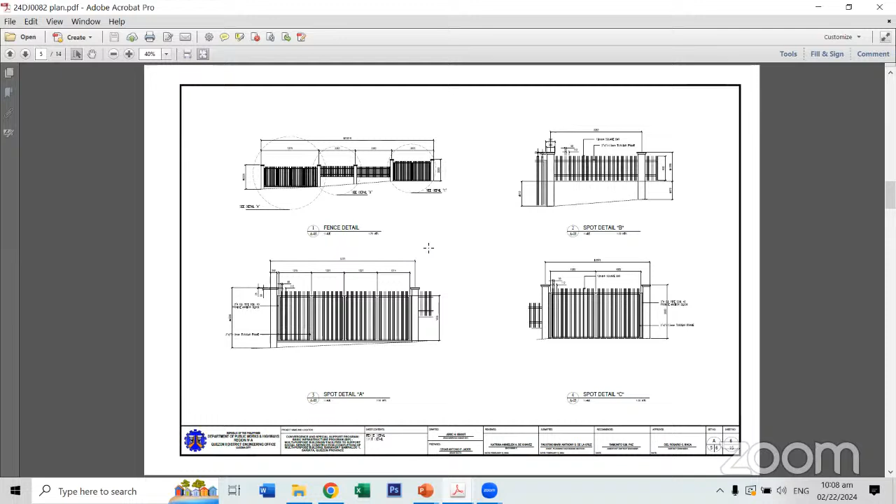This shows the site development plan for the project. This shows the rear elevation, right and front elevation of the project. This page shows the spot detail for A, B, and C, and the fence detail. This is the details of the DPWH standard project billboard.

These are the general construction notes. This shows the roof framing plan. This page shows the foundation plan and the column footing detail and wall footing detail. This page shows the roof framing detail, the water tank and pressure tank detail, roof framing detail, and truss one.

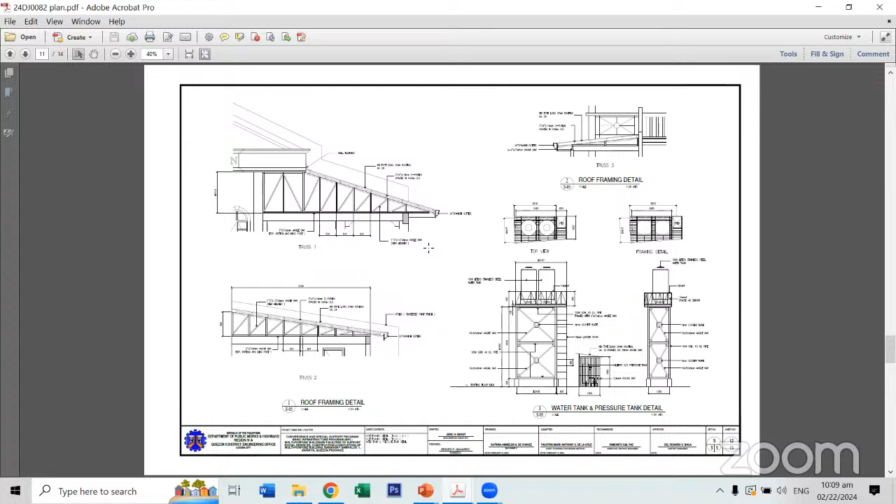This page shows the lighting and aircon layout for additional fixtures, also the electrical notes. This page shows the plumbing notes and the water tank line layout and the water line layout. This page shows the roof drainage line, drainage layout plan, and the catch basin detail.

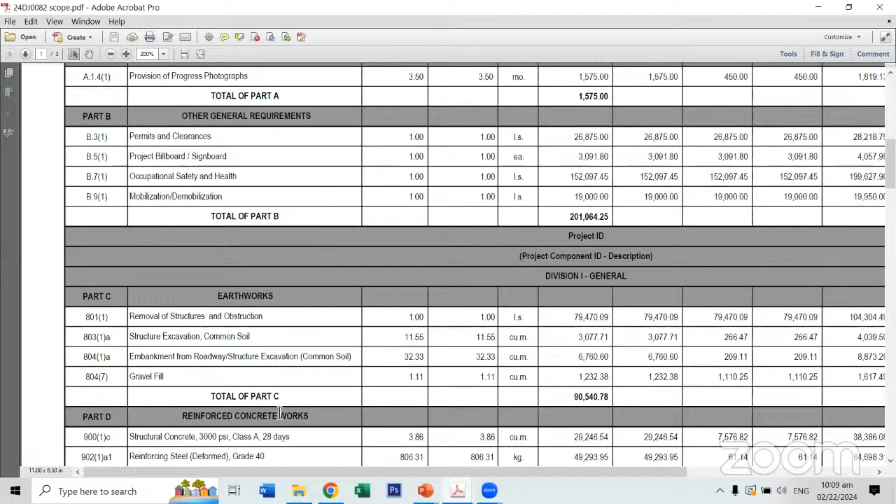Under Part A, Facilities for the Engineer, we have provision of progress photographs. For Part B, other general requirements, we have permits and clearances, project billboard signboard, occupational safety and health, and mobilization.

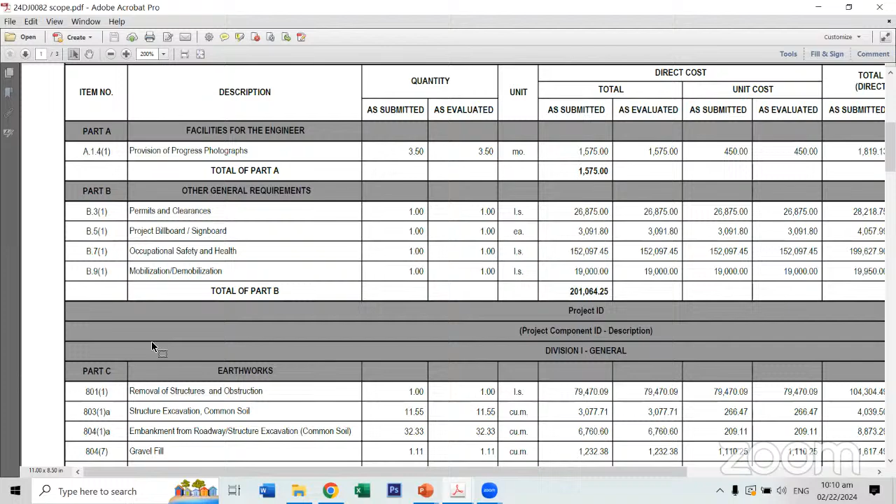Demobilization. Under Division 1 General, Part C Earthworks, we have removal of structure and obstruction, structure excavation for common soil, embankment from roadway, structure excavation for common soil, and gravel fill.

For Part D, reinforced concrete works, we have structural concrete at 3000 PSI, Class A, 28 days, reinforcing steel, grade 40, deformed, and formworks and false works.

For Part E, finishing and other civil works, we have ceiling, 4.5 millimeter metal frame, fiber cement board, fascia board, 19 millimeters fiber cement board, wall, 4.5 millimeter metal frame, fiber cement board.

We also have wooden doors and windows, fabricated metal roofing accessory, gauge 26 or 0.551 millimeter flashing. We also have fabricated metal roofing accessory, gauge 24 or 0.701 millimeter for gutters.

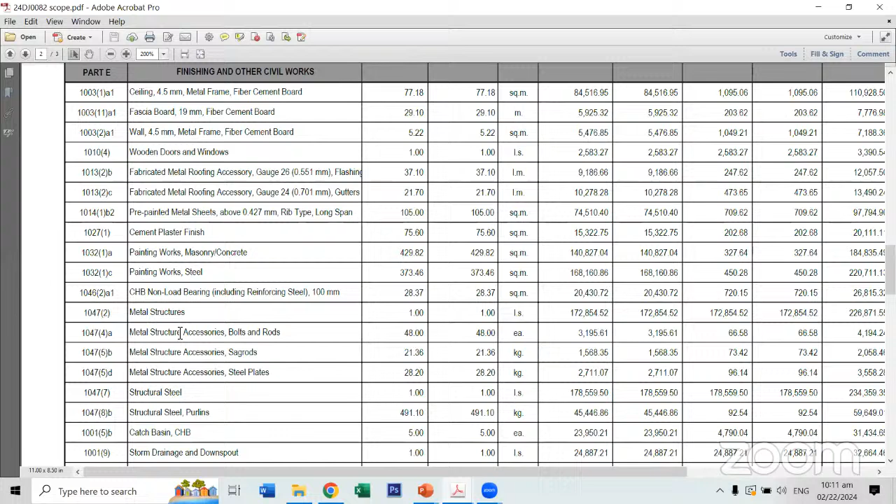Pre-painted metal sheets above 0.427 millimeter rib type long span. We have cement plaster finish, painting works for masonry and concrete, painting works for steel, CHB non-load bearing, including reinforcing steel, 100 millimeter, metal structures, metal structure accessories, bolts and rods.

Under metal structure accessories, sag rods, metal structure accessories, steel plates, structural steel purlins, catch basin, CHB, storm drainage and downspout.

Next, and cold water lines. That sums up Part E.

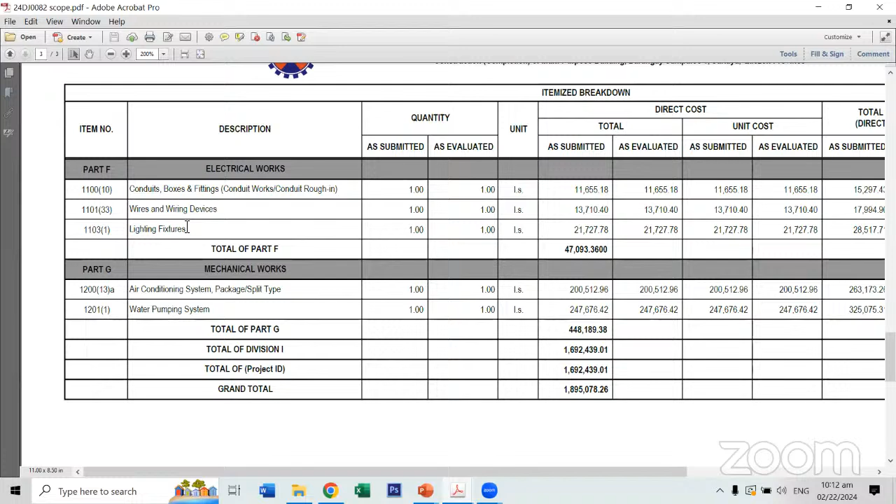Part F, or electrical works, we have conduits, boxes, and fittings, conduit works and conduit rough-in, wires and wiring devices, lighting fixtures. For Part G, mechanical works, we have air conditioning system, package, split type, and water pumping system. That's the end of total Part G.

Minimum equipment requirements. For minimum equipment requirements, we have one dump truck, one plate compactor, one concrete vibrator, one bagger mixer, one bar cutter, one bar bender, one welding machine, one cutting outfit.

Two welding machines, one cutting outfit, one power trowel, one truck mounted crane, one backhoe at 0.80 cubic meter, one jackhammer, and one chainsaw.

For manpower requirements, we need one project manager, one project engineer, one accredited materials engineer, one construction foreman, one first aider, and one safety officer.

The approved budget for the contract is 2,475,000 pesos, and the contract duration is 105 calendar days. Thank you.

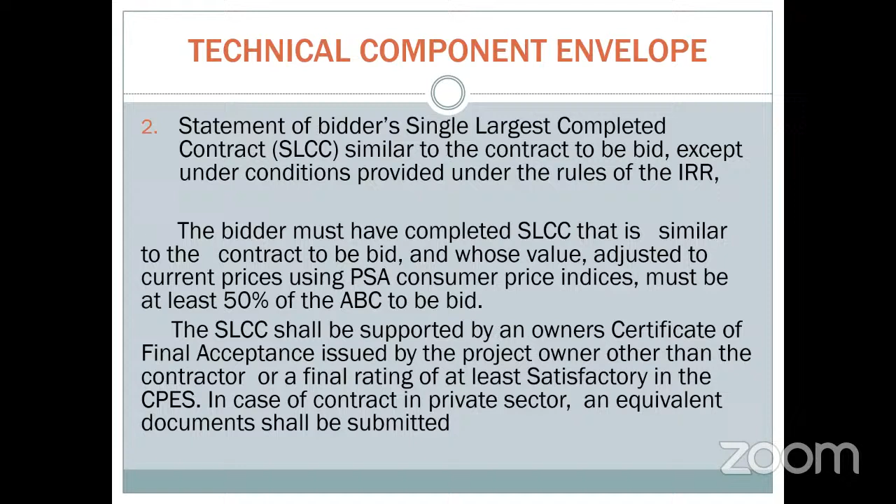Number 3, the Philippine Contractors Accreditation Board license or PCAB license, or special PCAB license in case of joint ventures.

For financial document, number 1, NFCC must be at least equal to the ABC to be bid, and the NFCC is the current asset minus current liabilities minus the value of all outstanding or uncompleted portion of the projects under ongoing, including awarded contracts yet to be started, coinciding with the contract to be bid.

Number 2, the audited financial statement showing, among others, the prospective bidder's total current assets and liabilities, stamped received by the BIR or its duly accredited and authorized institution for the preceding calendar year, which should not be earlier than 2 years from the date of bid submission.

Number 3, the bid security, an original copy of notarized bid securing declaration using prescribed format or any form of bid security in an amount equal to a percentage of the ABC in accordance with the following schedule of IRR section 27.2. A, the cash or cashier's or manager's check issued by Universal or Commercial Bank, 2% of ABC.

B, the bank draft or guarantee or irrevocable letter of credit issued by Universal or Commercial Bank using form DPWH Infra 10 or 11, 2% of ABC. C, the surety bond callable on demand issued by a surety or insurance company duly certified by the Insurance Commission as authorized to issue such security, 5% of ABC.

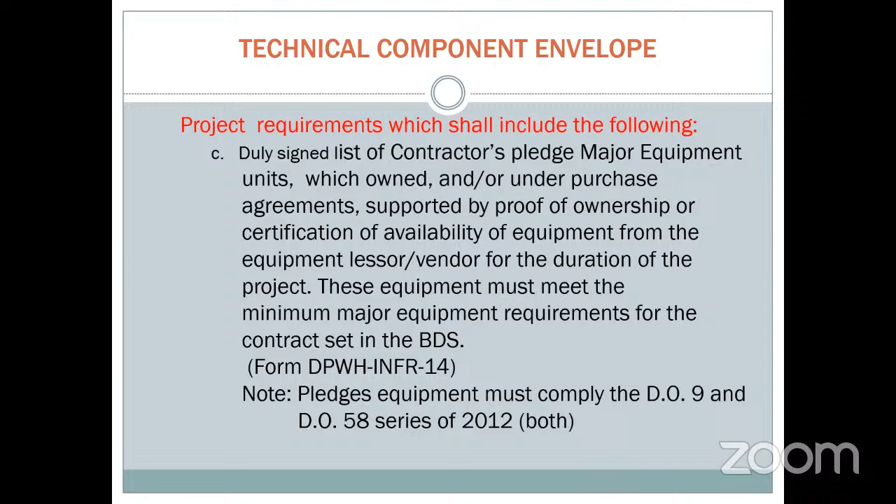D, the original duly signed omnibus sworn statement in accordance with section 25.3 of the IRR, and if applicable, an original notarized secretary certificate in case of a corporation, partnership, or cooperative, or original special power of attorney of all members of the joint venture, giving full power and authority to its officer to sign the OSS and do acts to represent the bidder.

For Class B documents, if applicable, duly signed joint venture agreement in accordance with RA number 4566 and its IRR, in case the joint venture is already in existence.

For the checklist of financial component envelope, second envelope. Financial component envelope. The financial proposal shall contain the following: 1, original duly signed and accomplished financial form.

2. Original duly signed bid prices in the bill of quantities using Form DPWH Infra 16 and 17. 3. Duly accomplished detailed estimate form, including summary sheets, indication of unit prices of construction materials, labor rates, and equipment rental used in the computation of the bid. 4. Duly signed cash flow by quarter using Form DPWH Infra 18.

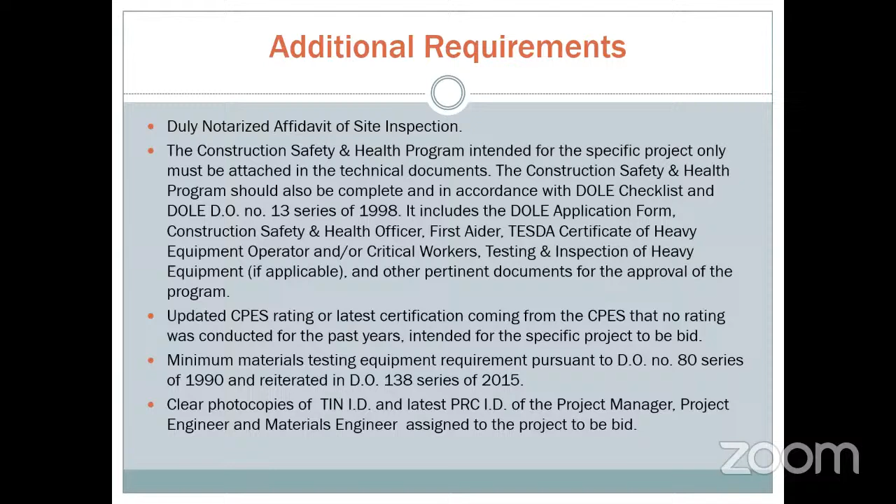Criteria of eligibility screening, preliminary examination of bids, evaluation of bids and post-qualification, as per 2016 revised IRR of RA 9184 and latest GPPB issuances. The first envelope shall be opened to determine compliance with documents required to be submitted.

For eligibility and for the technical requirements as prescribed in the IRR, the BAC shall check the submitted documents of each bidder against the checklist of requirements to ascertain if they are all present, using pass or fail criterion.

For every document required that is present, it shall be rated pass. But in case of failure to include any of the requirements, resulting in incomplete required documents, it shall be considered failed. Otherwise, the BAC shall rate the first envelope pass.

Immediately after determining the compliance of the first envelope, the BAC shall open the second envelope for the financial document, again using the pass or fail criterion in determining compliance based on the checklist requirements. When the bid price exceeds the approved budget of the contract or ABC, it is automatically rated as failed.

All bids shall be subject for evaluation, and the lowest calculated bid or the highest rated bid shall undergo post-qualification to determine whether the bidder concerned complies with and is responsive to all the requirements and conditions specified in the bidding documents.

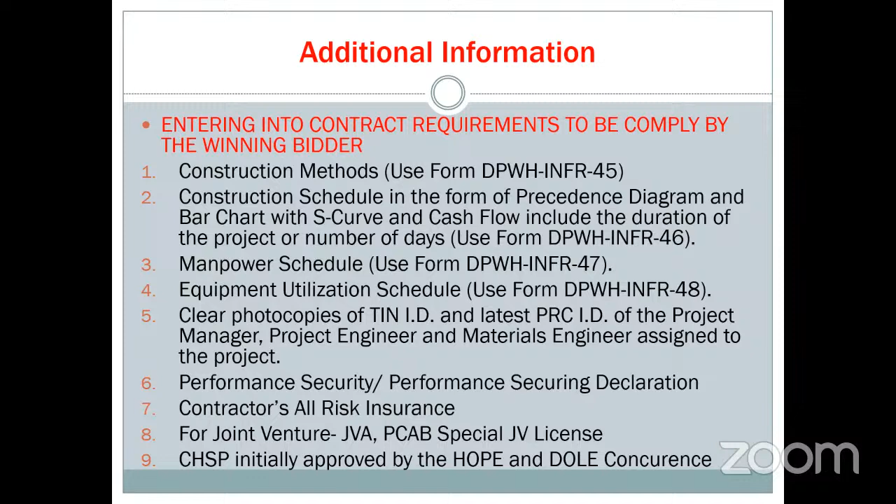Reminder to bidders who will submit manually and to bidders who submitted their bids online that will submit their original documents: submit documents with table of contents, paginated and book bound with tags, pursuant to DO 90 series of 2002. Proposal booklet should be signed and attached in the technical envelope.

There should be documentary stamp on bidder's bond and all other notarized documents. Materials engineer should be accredited, and certificate of accreditation should be updated, intended for the specific project. The estimate and the summary sheet must be in detail. The contractor's authorized representative must present their valid company ID and any government-issued ID.

Reminder to all bidders: please use A4 size bond paper for the technical and financial bid proposal. Use the prescribed infra form which can be found in the proposal booklet updated March 31, 2021. DO 35, series of 2008, guidelines on the implementation of the three-strike policy in the procurement of civil works and consultancy services contracts by the department, reiterated in DO 17, series of 2015, the three-strike policy in the procurement of contracts for infrastructure works, goods, and consulting services.